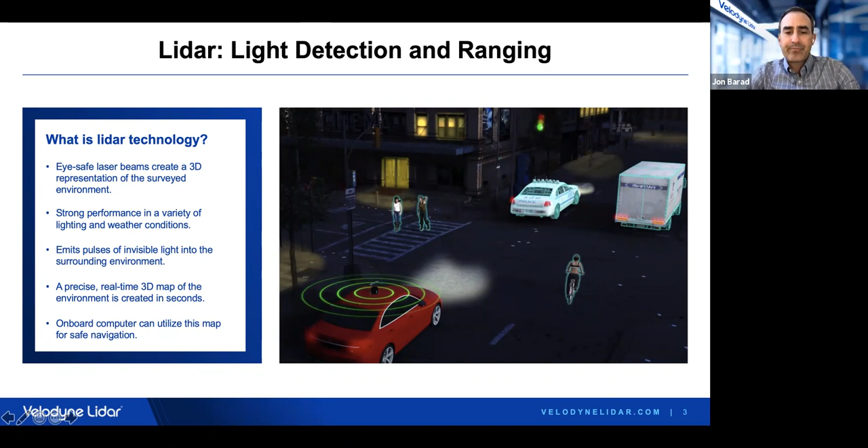Mapping is a big area where LiDAR is used to produce very high resolution maps for all types of applications, whether it's AR, VR, or your Google or Apple Maps applications. This is an exciting area, certainly.

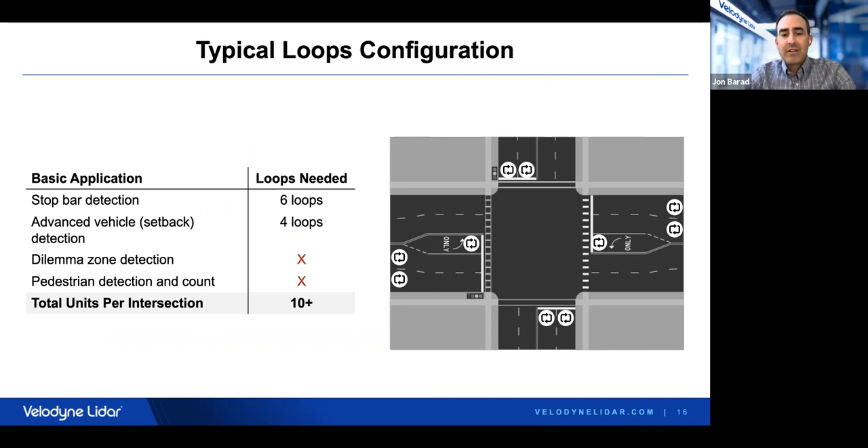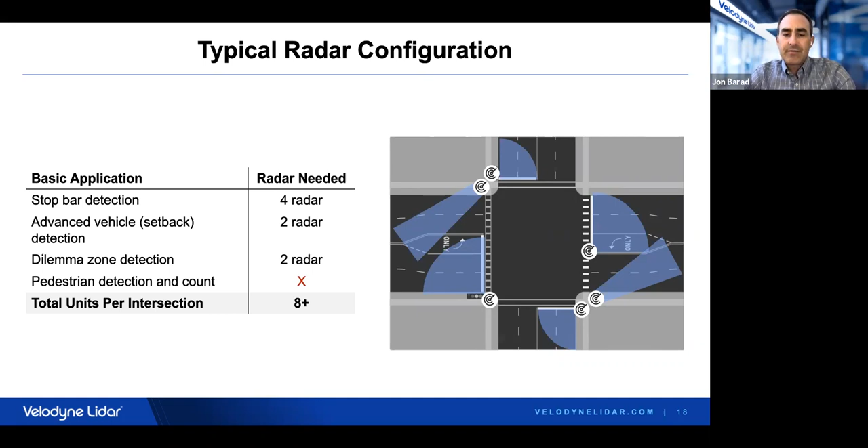With inductive loops or coiled loops that are buried underneath the pavement, you may need almost a dozen loops - you may need a half a dozen cameras to do the same thing. And similarly with respect to radar, radar doesn't really have the resolution to identify small objects at large distances necessarily. So certainly a number of radar units are needed, but with LiDAR, a single sensor can cover the entire intersection.

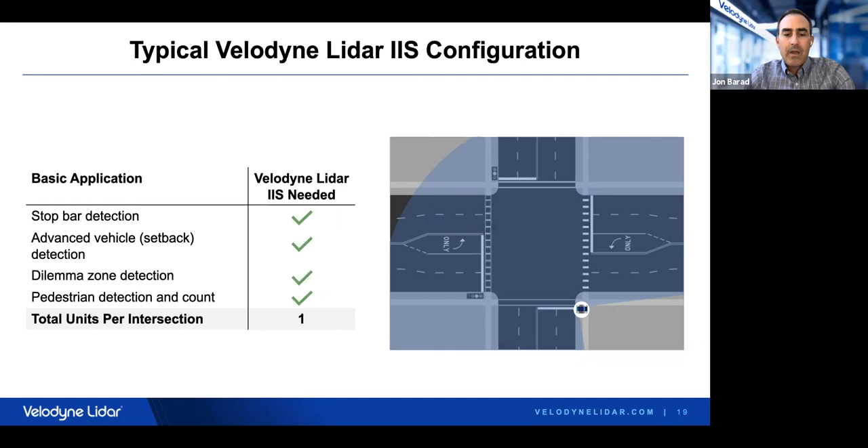But I do want to touch on privacy here a little bit as well, because we're entering, or we probably already are in, a world where we're starting to see much more sensitivity to our privacy needs. GDPR in Europe has certainly restricted the use of camera technology in smart city applications. It's starting to be discussed and enacted here in the US, with I think almost a dozen different states having stopped using facial recognition for law enforcement work.

There was a bicameral bill last year in the House and the Senate that didn't pass yet, but hopefully will get picked up in this new Congress to discuss what to do about facial recognition. Even some states don't even allow for speed cameras to be put up.

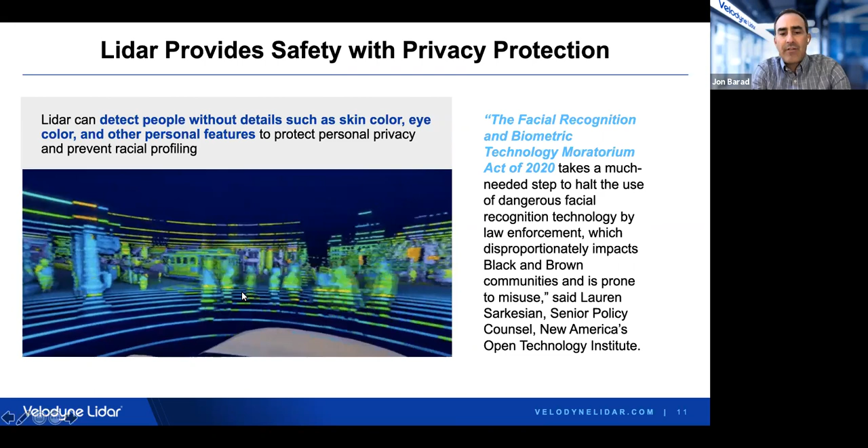So the idea of putting cameras up everywhere to provide these analytics is concerning to many people. But as you can see, LiDAR doesn't really provide the same type of information that would be needed to do any facial recognition. And so there's a lot of advantages in that.

I think the reason that this application is getting attention in the traffic management space initially is, I think we're all aware of the problems with traffic. Perhaps they've decreased a bit because of COVID, but there's still incredible amounts of inefficiencies. Traffic causes inefficiency not only in your time, but there's costs that congestion brings about through fuel efficiency. Most fuel is burned during congestion traffic events.

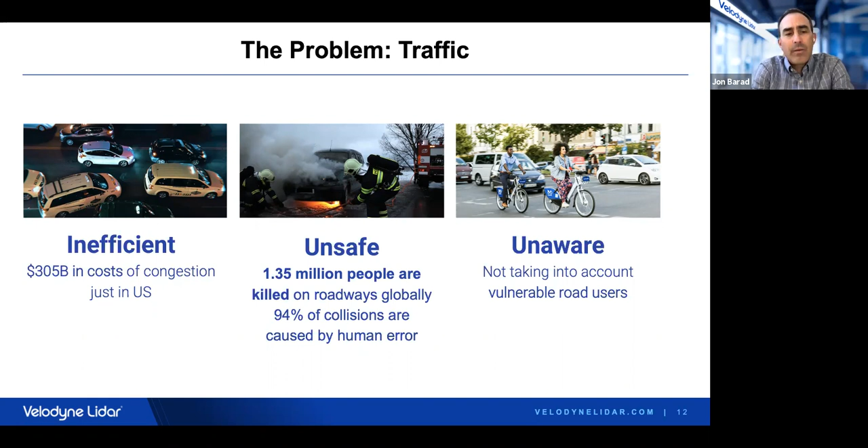In addition, over 1 million people are killed every year on our roadways, and it's highly dangerous. And so having more automation, having the ability to better predict and improve efficiency, reduce congestion, will certainly help us improve safety. And the sensors that are out there today, or the equipment that's out there today, is decades old and just not very intelligent.

The equipment is expensive, and really just focused on a limited set of users of the road, like vehicles. That's all an inductive loop monitors is a vehicle.

And obviously, some certain technology, as I mentioned, doesn't really work in all lighting conditions or weather conditions, and there's certainly no analytics. If a city wanted to analyze the safety of an intersection today, the only way to actually do that is to look at the police reports and analyze the accidents. That's a very reactive way to look at safety.

And so I think across the board, there's costs that can be addressed and efficiencies and value that can be contributed to smarter infrastructure, and congestion and pollution, and safety.

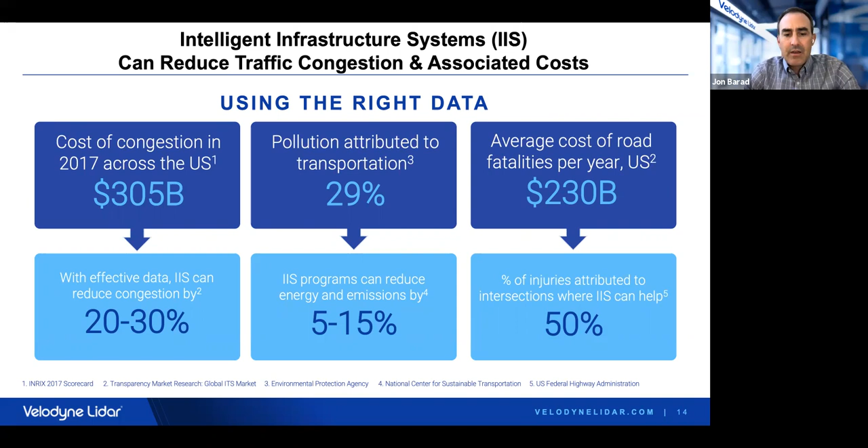From a cost perspective, you might think LiDAR is expensive. Well, the good news is that the cost of LiDAR is coming down dramatically. It already has come down dramatically. We're ramping up production of our sensors. Velodyne is the largest producer of LiDAR in the world today, and we have scaled manufacturing of our sensors across our product line. And as a result, that brings down the cost and improves ruggedization and robustness of the sensor, which is important when you're looking at the type of sensor to buy.

But when you think about it from the standpoint of the total cost of the system solution, you might say, well, cameras are cheap. But when you need a half a dozen cameras or a dozen inductive loops to outfit an intersection with a smart safety or intelligent application, it becomes expensive. Some of the most expensive items within a smart city or fixed infrastructure deployment are the electronics and wiring needed to run those sensors. But because of the range and resolution of LiDAR, we can outfit an intersection with a single sensor, which really reduces the overall cost and improves efficiency.

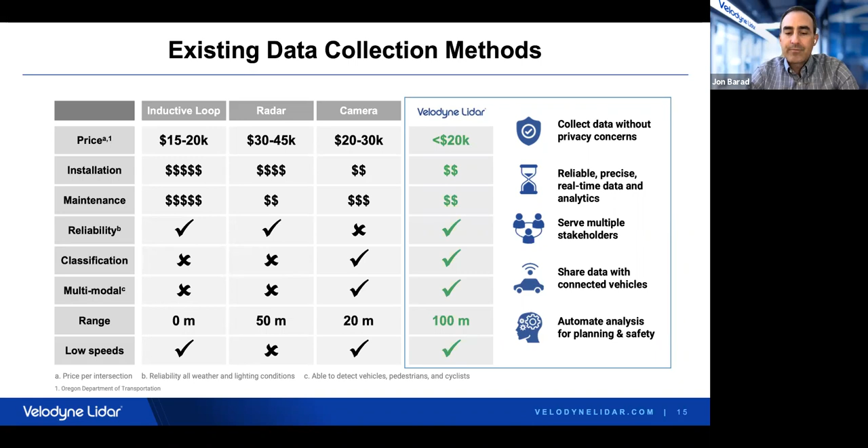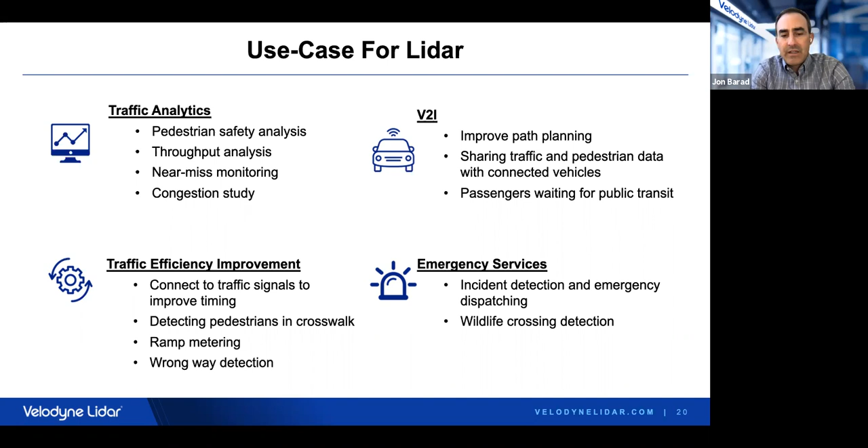And we've got a number of projects in the V2I space. As we begin to bring connected vehicles into our world, the importance of having information from an intersection in real time, ahead of when a vehicle plans to get there, can be very important for path planning, or to inform an upcoming bus or shuttle how many passengers are waiting at the stop. And emergency services is an area that's so important - getting paramedics, police, or fire to an accident scene as quickly as possible, any reduction in time can save lives.

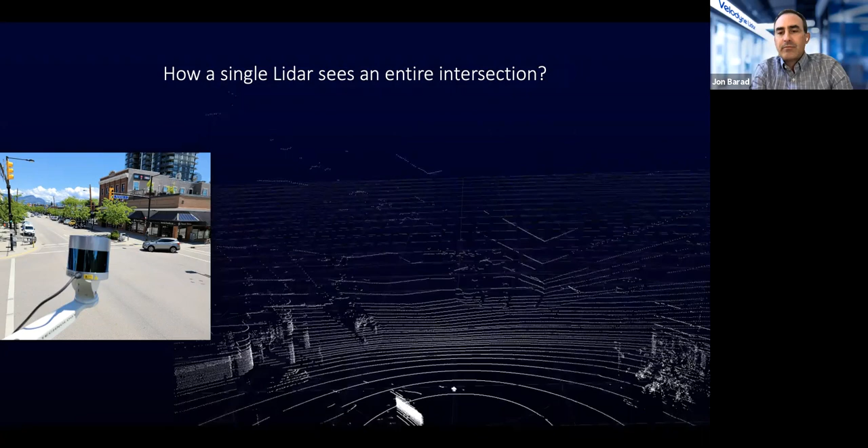So what does a LiDAR see? This is our VLP-32, our Ultra Puck, a 32 channel LiDAR. It looks like we're really high up, a bird's eye view, but really this sensor is about 10 to 15 meters off the ground. We've created a real-time 3D model of this environment, so we can move around and scroll around within the scene. This is raw LiDAR data - each white line is a new laser channel being emitted, and you can see all the way down the approaches of the intersection, giving full coverage.

If we then layer on top of this the perception layer, you can see we start to classify and track all types of objects. We're classifying cars in red, there goes a motorcycle in dark blue, and we've got pedestrians in green. This really provides a lot of detail. We can even create geofence perimeters around certain areas, like crosswalks, and monitor who's in the crosswalk, what direction they're going, and how fast they're moving.

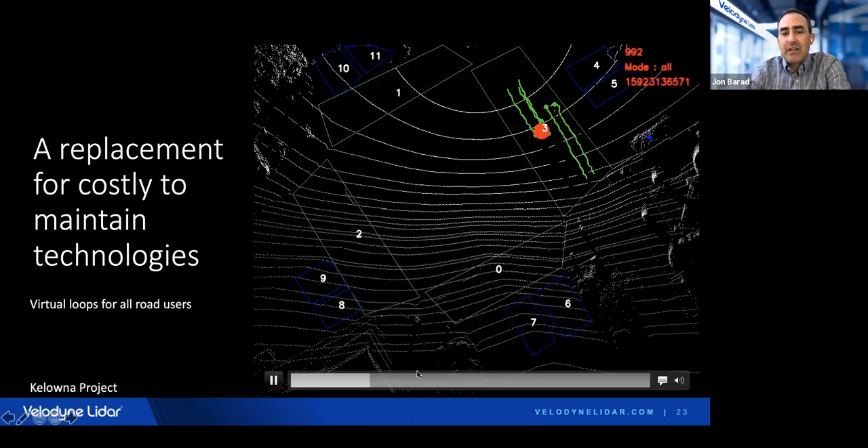Here we also have virtual loops, which are basically geofence perimeters around where a coiled or inductive loop would be. We can count cars - it's really just a rich source of analytics and data to integrate all types of exciting applications: how fast is the car moving, what direction, what trajectory, which turning movement are they making. And really another important one is how close they're coming to other types of road users, which is important in analyzing near miss activity.

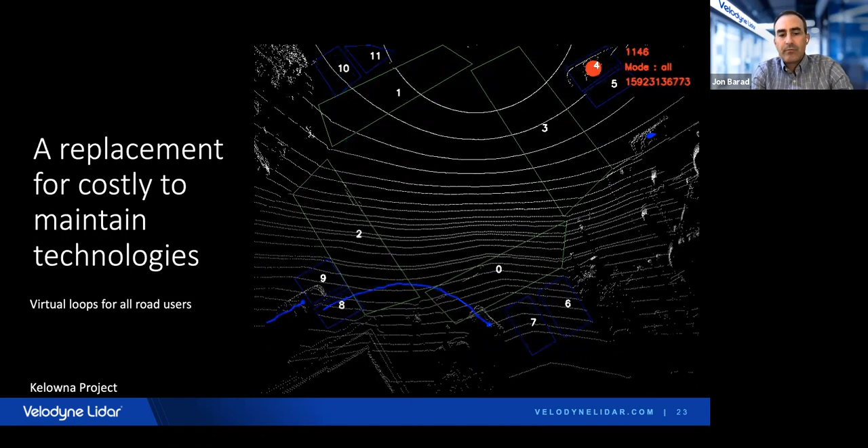Our platform is powered by an NVIDIA Jetson processor. These are really great, compact, low power, edge-based processors, and we run our software and analytics at the edge.

Once the data is processed at the edge, we send the analytics up to a cloud application that enables us to do all kinds of slicing and dicing of the data for analytic purposes and for reporting. We also have an API that can be integrated into various applications.

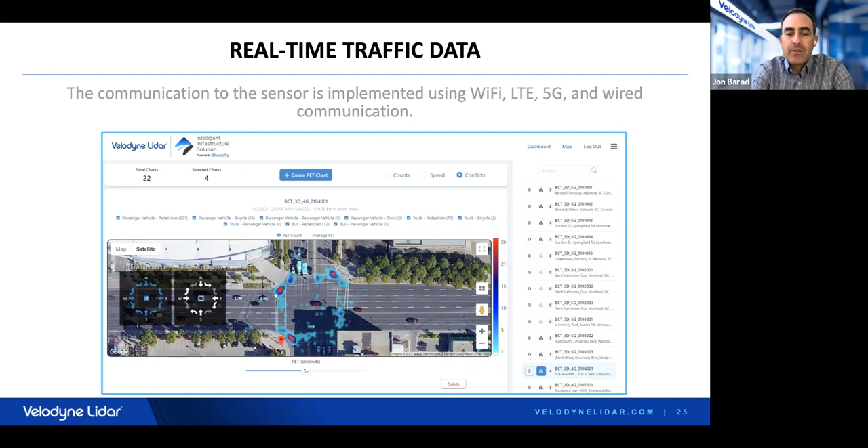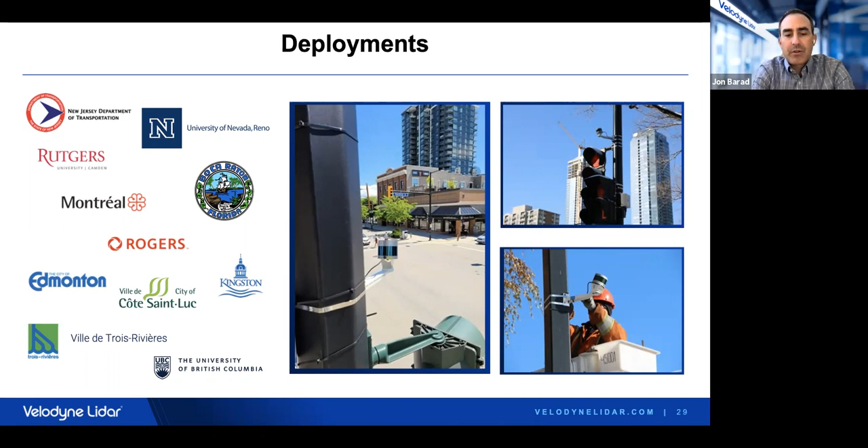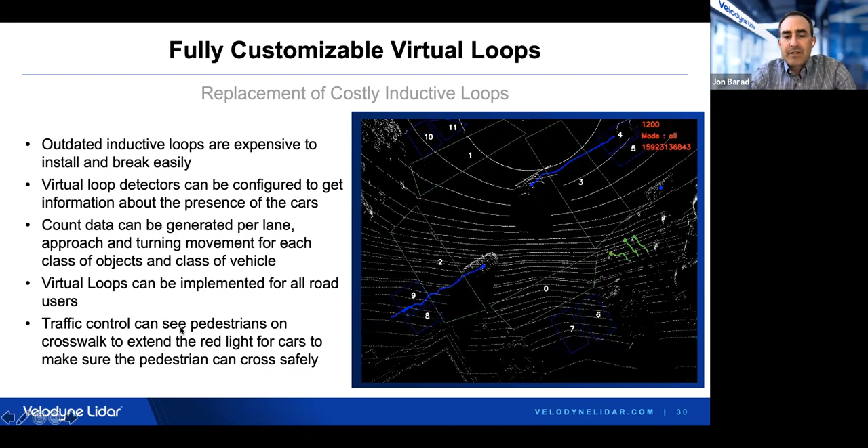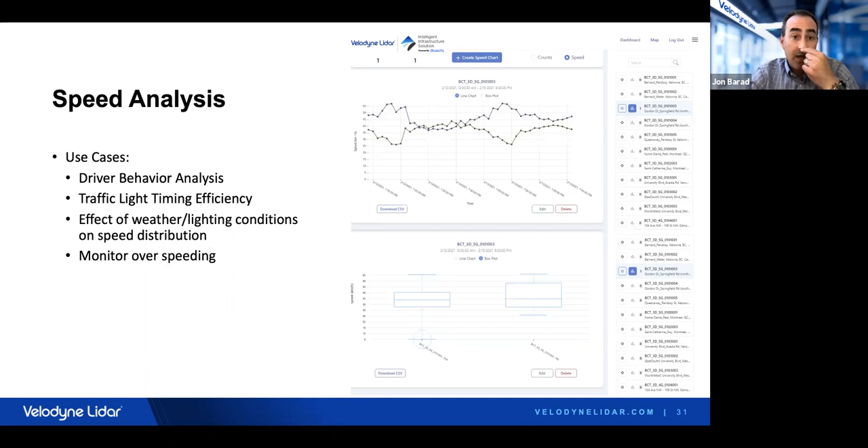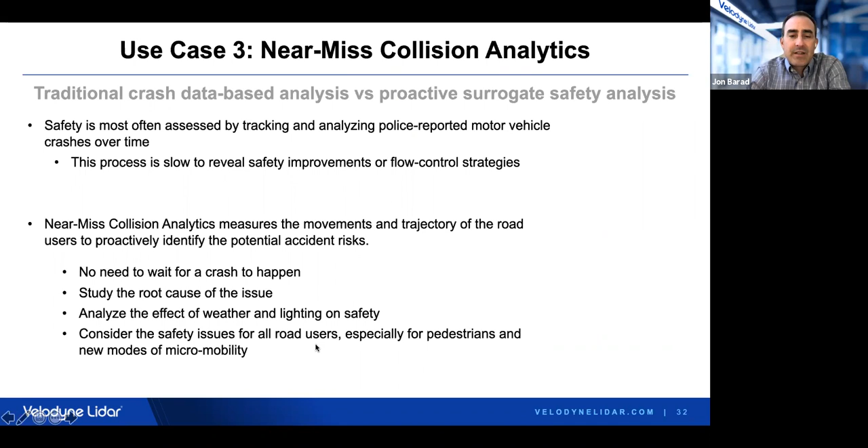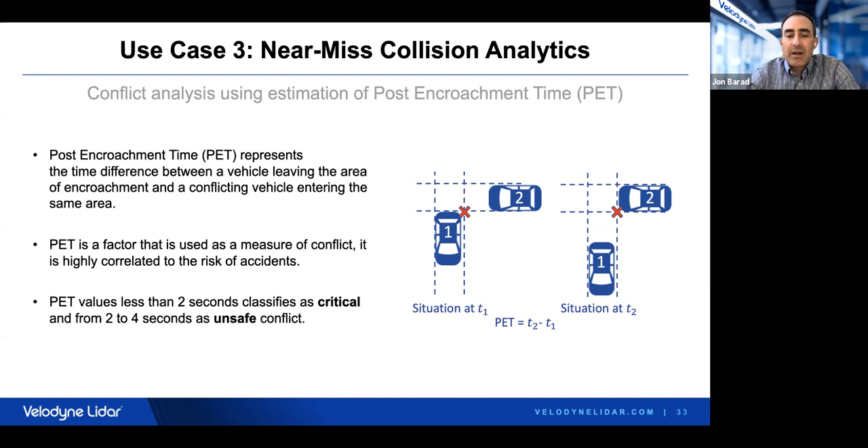Near miss collision analytics is something really exciting. As I mentioned earlier, really the only way to monitor collisions today is to look at police reports, and we need a more proactive solution. So we look at what's called post-encroachment time, basically the time difference between when two objects' paths would intersect. That time difference is a PET value. Typically, under 2 seconds is a pretty unsafe PET value, so identifying where those occur within the intersection can be really important.

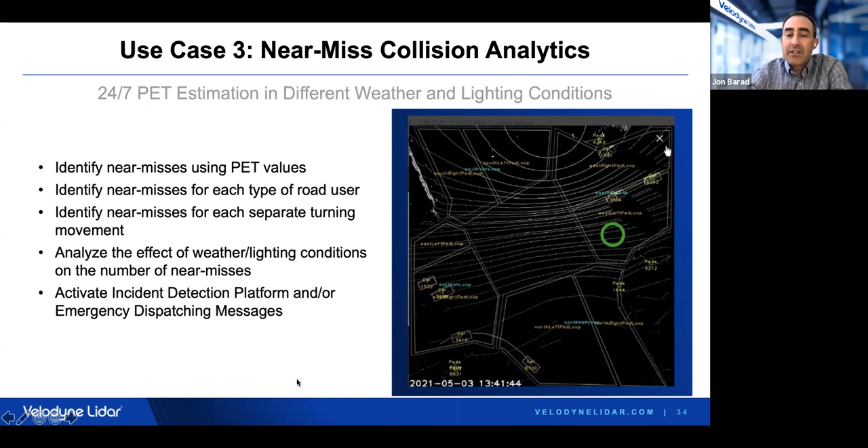Here's a little video showing a pedestrian crossing the street with a vehicle turning right. That event has a very small, less than 2 second post-encroachment time. We can start to analyze that and look at the trends, understand if this is happening a lot within this intersection, and if so, make some proactive changes before somebody actually gets hurt.

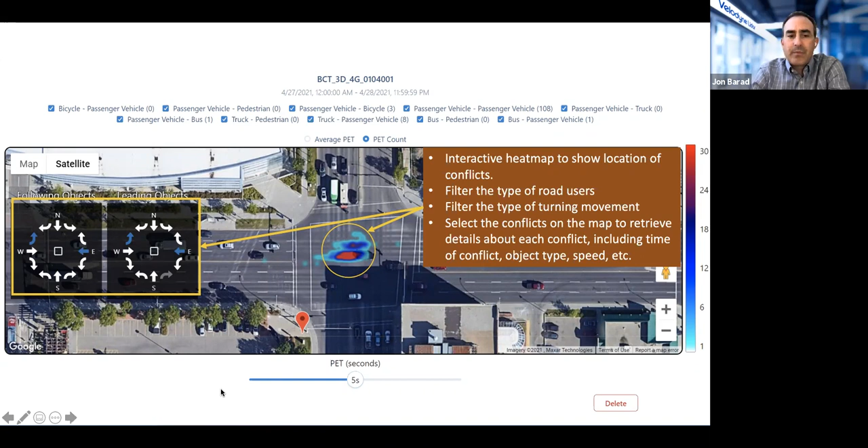In the dashboard, we have an interactive heat map where we can look at all these different types of interactions between road users and do some analysis as to what the biggest outstanding issues are, and understand within the user interface where some of these issues might be and what some of the dangers are.